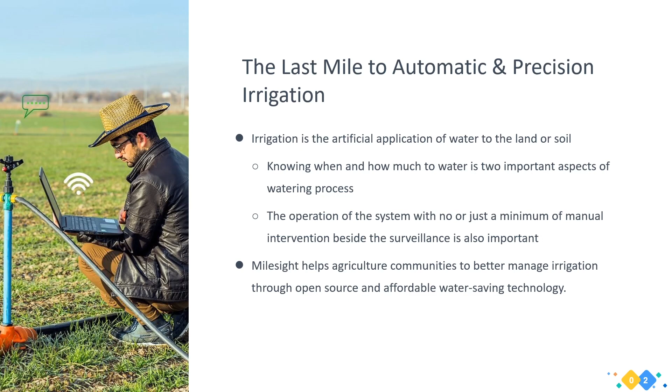Before going into the details on the applications, we will first explore the pain points the agriculture communities are facing nowadays, their causes, their costs, and we will also explain why automatic and precision irrigation is important, and exactly how some of the technology works. Then we'll look at the key applications after a very quick summary. I can take any questions from you all at the end of this session.

Let's start by looking at the pain points for our farmers and agriculture communities. I think it forms a vicious circle since the farmers lack information or have very poor training, they don't know how to approach new technology or technical implementations. For example, they don't know how to find the optimal irrigation schedule in order to get the best water use efficiency, and how to realize automation in the field and reduce potential costs.

Then they waste resources, spend more money, but with very bad quality, less yield, and finally low production. Less yield means less income. Then a small budget prevents the farmers from learning new technical experience or introducing new technical knowledge in order to implement new solutions to help them grow more crops and get more income. So here we can find there's no very good beginning and not a very good outcome.

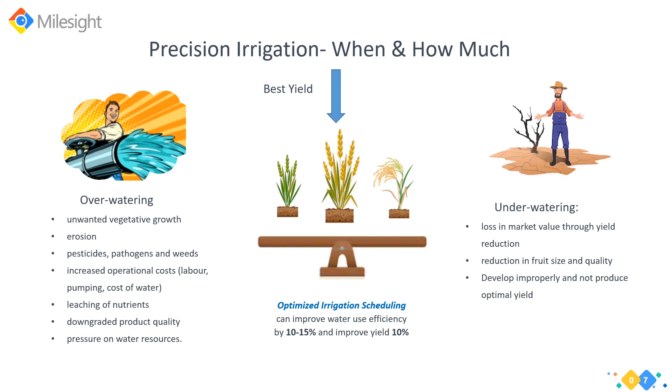So right there in the middle, I think there is a very sneaky optimal timing. How to find it is really, really hard.

And this is another question for automatic irrigation: Can I control it remotely when I'm far away from the field or when I'm out for holidays? Is it easy to deploy and operate with no or just minimal manual intervention besides surveillance? And can I make decisions based on scientific data rather than my previous experience? Does it work with my existing water valves? Because I don't want to redeploy my watering networks. I think later you can find answers to all of these questions in Milesight's solution introduction.

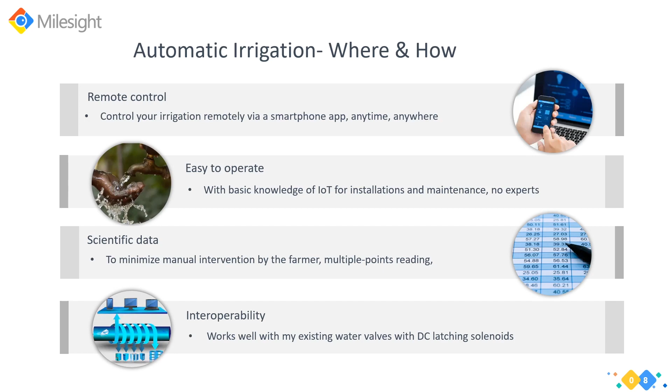The second question I guess you will be having is, I know it's important, but what else can I get? What are the benefits? Think in advance how you want to use your smart irrigation. How complex will it be?

Scheduling is a very useful feature as it gives you peace of mind. Even when you are on vacation, when you connect it to a moisture sensor, it can automatically shorten or extend prolonged irrigation times to make sure your plants are not thirsty or drowning in water.

And with a smart irrigation system, you can set up separate irrigation zones, separate irrigation areas for plants that have different needs. Each irrigation valve irrigates its own area. The area irrigated by one valve is one irrigation zone, so you can personalize each irrigation zone and water the soil as much as the plants need.

And the notifications, sometimes we forget it, but notifications are useful and convenient. You can get notified when the irrigation starts, when it's completed, when you finish it, and how much water is used, and the water volume, the water quantity, and the system notifies you if your water volume leaves your pre-settings or your ideal optimal range in the system.

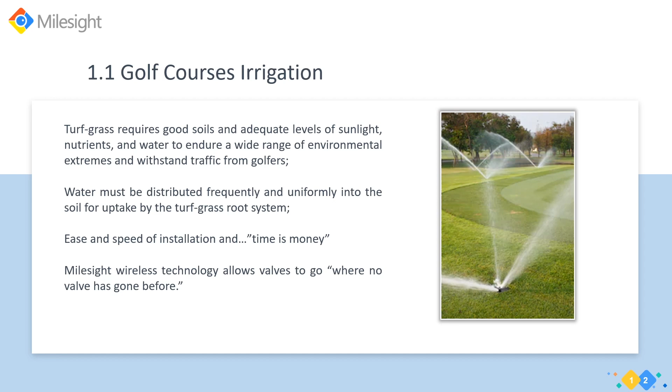The Milesight wireless controller is the ultimate solution to simplify your installation and reduce your costs by going wireless, by cutting off the cables, encoders, decoders, those kinds of equipment. The Milesight LoRaWAN based controller can help golf club owners reduce installation spending by using a dedicated wireless device to control the valve from the control room.

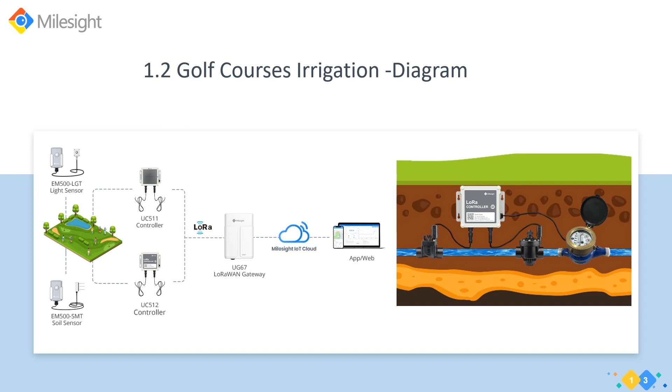Construction sites and traffic medians, roundabouts, rural properties, public parks, or places lack standard electric power. But with Milesight LoRaWAN-based sensors and wireless controllers for the irrigation valve, we make it possible for municipalities in charge of landscape irrigation to enjoy the benefits of advanced irrigation. The sensor's battery life is up to a maximum of 10 years. It depends on class A or class C, mostly class A, and also on the spreading factor. If you are using class A and spreading factor 7, a maximum of 10 years is guaranteed, making replacement a very simple task, just a piece of cake.

The smart valve can be either solar-powered or battery-supported; the system integrator can choose the most suitable option. The operator can communicate with the valve from kilometers or miles away, even in urban areas. Plus, with all installed components hidden safely underground and out of view, the Milesight wireless smart irrigation system is truly vandal resistant. In landscapes, many small animals may be curious, like in front of a camera, and sometimes they may destroy equipment. So an underground installation can effectively protect the device from any attack.

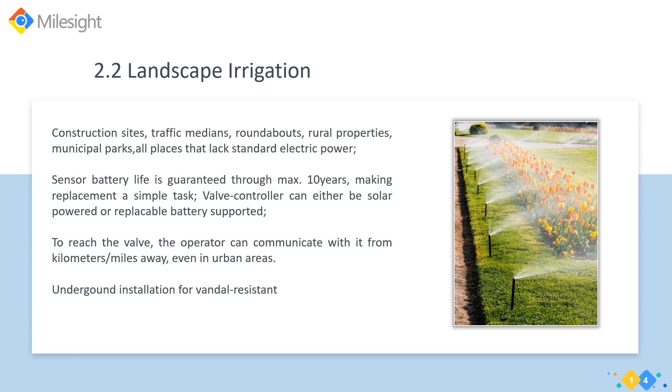With the Milesight LoRaWAN sensors and valve controllers, no extra irrigation controllers are required, because those controllers are often very accessible, easy targets of vandalism or theft. Once the gateway and components are deployed, you get immediate valve open or close control and feedback directly from each area.

And the Milesight weatherproof device is IP67. It can be buried below surface level into a valve box with no problem. But according to our test, of course, the LoRa signal strength is a little bit reduced. So each sensor and controller has its own identification number that is logged at the remote control center or to your smartphone app. And later I will give you more details about how to set it up.

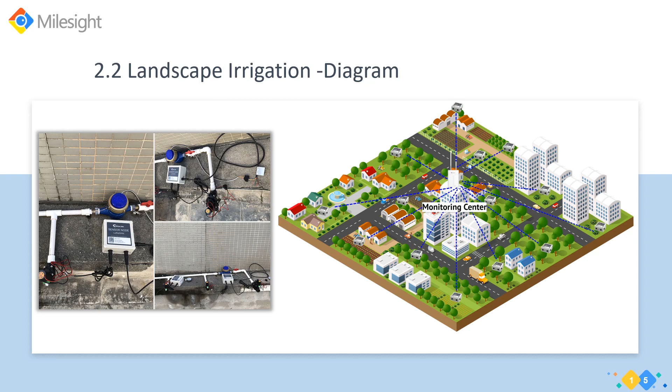And future expansion has never been so easy. Just store the valve into the irrigation box and you are ready to go anywhere, anytime. And one of the most common problems with farm irrigation systems has to do with irrigation scheduling. Irrigation scheduling simply answers this question: when do I water? How long do I water? And starting an irrigation cycle too early or running an irrigation cycle too long is considered overwatering, okay?

And at the very least, it's practical waste. It wastes water and money. However, overwatering can cause crop damage if done on a prolonged basis. Likewise, starting an irrigation cycle too late or not running the system for a long enough period of time is considered underwatering and can cause reduced yield and poor crop quality. I think farmers hate to see this result.

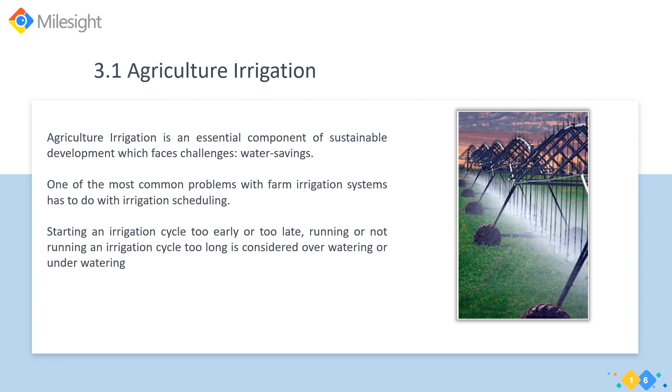The Milesight LoRa wireless smart controller can not only open and close your valve kilometers away, but a daily scheduled scheme with start periods can be recommended directly by the controller. And we have used the same technology to start your remote pump too, not only the valve. You can connect our controller to a bistable relay. The Milesight smart controller will operate your pump at the right moment and perfectly synchronize with the status of your valve to help your pipes only when it's needed.

And you have no easy access to power at the pumping spot. I think that's a common issue, and your pump is running on a generator set. No issues. The Milesight LoRa wireless smart controller will trigger the start or the stop of your generator according to your command.

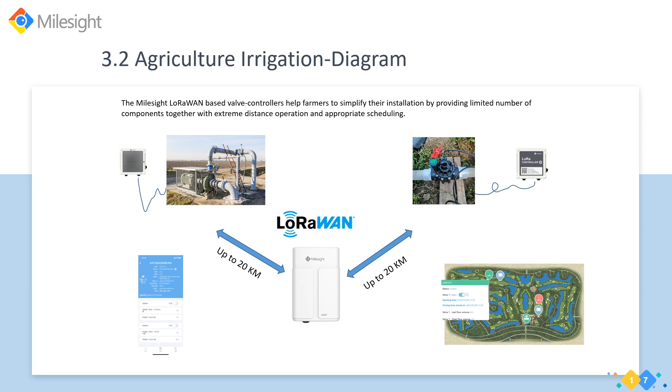And the last mile is to understand how to set up the whole smart irrigation system. Here is a diagram. Let's go through it very quickly. The smart irrigation system is only responsible for collecting data from sensors and sending the predefined user orders or commands to the actuators that make the water sprinkler go on or go off. The data is collected by various sensors such as the soil moisture sensors, the weather sensors like the wind sensor or the rain sensor, and the light sensor.

And on a user device, you can define the moisture and the temperature range in the system. And when the threshold is reached, action is performed. For example, you can start and stop irrigation when the moisture is at a certain level. The irrigation controller can also make sure that water is actually flowing, that the pipes are not clogged or leaking, etc. The user can control the system easily through a smartphone app.

Of course, if you want to check for water leakage in the pipes, you can use our water leak detection sensor as well. And based on weather information and the sensor data, the controller can determine on its own when is the best time to irrigate, how long to irrigate, and how much water to use.

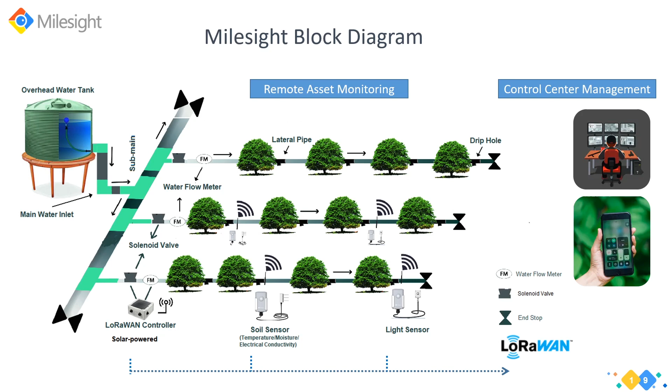But still a lot of customers are stuck in the last step, in the last mile of installation. That is how to get the water controlling automatically, how to exactly realize the remote turn on and turn off of the water supply in the field wirelessly, okay, based on their valves or based on their water pumps.

Milesight, we are going to launch this new product, the LoRaWAN-based valve controller, UC510 series. So there are two different versions, the solar version and the battery version. But of course, I think the solar version is the first choice. We strongly recommend you try this model, UC511.

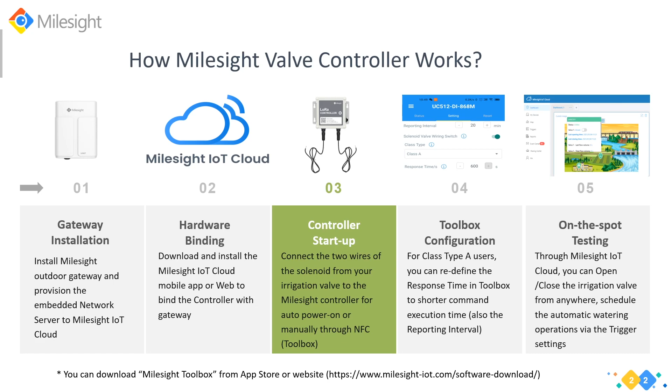Let's go through a few important features in Milesight IoT Cloud. First is the valve status display. These three icons can easily tell you the status of valves, whether they are on, off or in alarm. And when it starts to water and stops watering, when is the last watering time, and how

much water was used last time, and total volume you can check from this dashboard, or you can check it on the Google map as well. So anyway, the valve status display is at a glance.

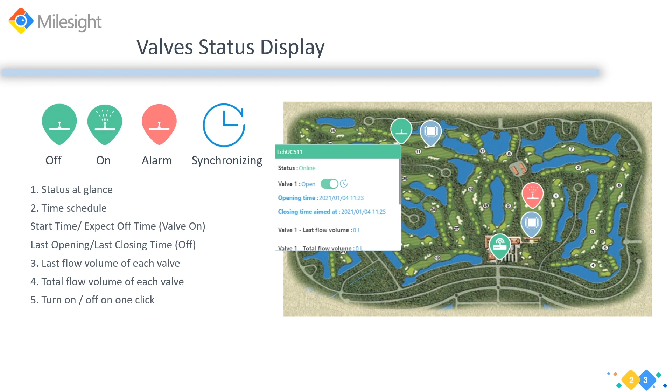And do you want to know how to control the water volume just through the irrigation duration here? You can set it from 0 minutes to maximum 24 hours. 0 minutes means continuous watering, no automatic stop operation at all until you manually operate, if you input 0 minutes.

And you can get notified when the valve opens or when the valve closes. You can set an alarm threshold for the water volume of each valve and get notification on dashboard, or by email or by mobile app push when the volume leaves your range.

Because each controller has two interfaces, the solenoid interface, it can connect with two solenoid valves here in our controller. And also there is one interface that you can connect with one or maximum two water meters, okay, the pulse meters.

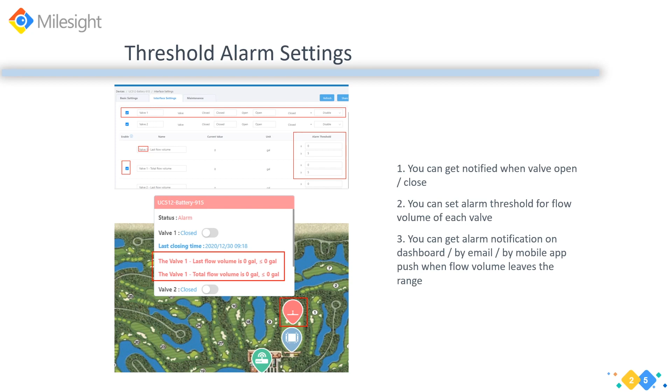In Milesight, you can get the device details in this Milesight IoT Cloud platform. You can get the last operation time from both the app and the web interface. So here you can find the last opening time, last closing time, and which model it is, the solar panel version or the battery version.

And our controller only collects and reports the pulse data from the flow meter, water meter. So you need to define the pulse of the meter. For example, 1 pulse means 1 gallon or 1 liter of water, and 5 pulses means 5 gallons or 5 liters of water. This setting is up to yourself. Then this exact number will be displayed in the IoT Cloud platform. So you need to check whether 1 pulse means 1 gallon or 0.5 gallon.

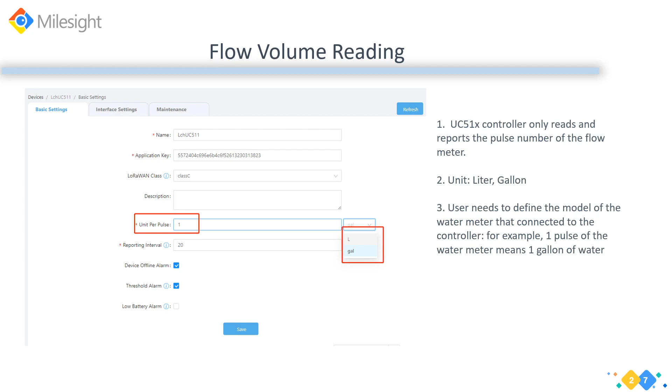And work type options, Class A or Class C, is very important for the battery life, working life. Class type setting is closely related to the power consumption. As we know, Class A requires the lowest power, but you may face command delay. Class C allows your new settings, new commands in cloud to take effect quickly in the end devices, just a few seconds, almost no delay at all, but it uses more power.

For example, just click turn on the valve in cloud. Class A can only make it happen in the end devices in 20 minutes, but Class C can make it happen in just a second. 20 minutes here depends on your reporting interval, okay? If you set the reporting interval to every 60 minutes, your on command will only take effect 60 minutes later. So here is the difference between Class A and Class C when you want to carry your command from the cloud into the end devices.

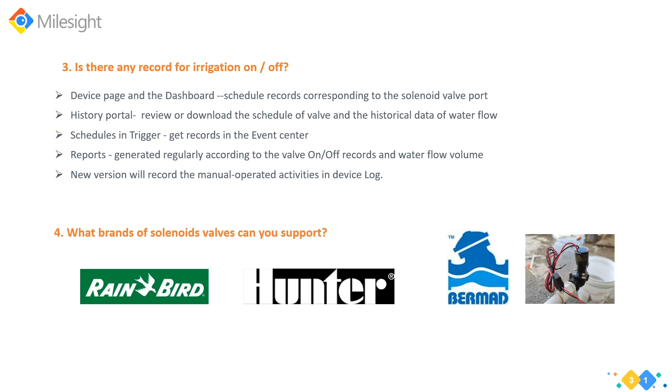And you may ask, what brands of solenoid valves can your controller support? Well, we have already tested with Bermad, which I think is a very popular brand in the solenoid valve market. And we have already got Rain Bird and Hunter samples for testing. So here you can find our testing result.

And don't worry about the water wasting. This water will be recycled for cleaning. And we also have a small garden where we can manually water the plants using this water.

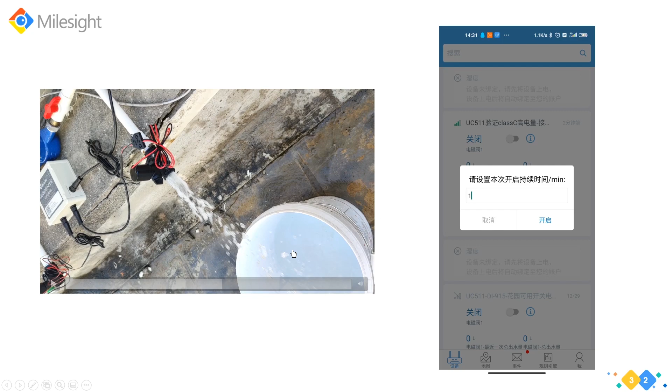So finally, let's see the summary. We have explained why automatic and precision irrigation are important and why they should be considered in a number of applications. This is an idea that helps not only farmers, but also watering gardens, municipalities, and small garden or small plant owners, so they can use this solution as well.

It senses the soil moisture and switches the valve automatically when you set up the schedule and triggers properly in the Milesight IoT cloud platform. Once you set it up properly, just leave it alone to work in the field and get all the data automatically according to your settings.